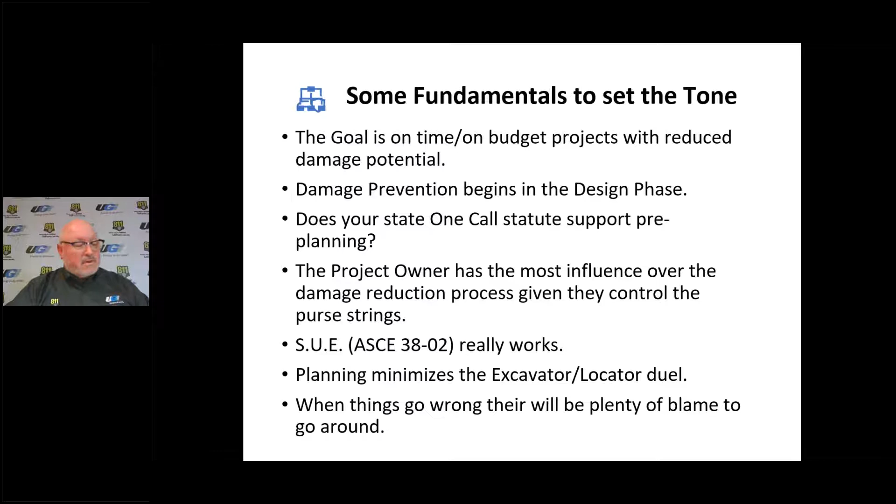Before I get into number one, I want to say that the discussion today about the 10 questions is something we've developed over time. It was an article we did for the Excavation Safety Guide back in 2016, and we updated it in 2019 based on the change in the Pennsylvania law, which really strengthened some of the questions, comments, and suggestions we'll talk about today. So with that, again, there's no silver bullet.

These 10 questions work. They can apply. There can be others you'd add that may be more unique to your situation, industry, or challenges you're having that might be more appropriate. So again, it's a guide. It's not a silver bullet that will fix every scenario out there.

The impetus for why we moved to the 10 questions article, and why we at UGI are subscribing to many aspects of that, is that we were seeing that many excavators will bid work without really understanding what the one-call statutory requirements are. That's more prevalent when that excavator may be working in multiple states and not always in Pennsylvania, Maryland, New Jersey, or the Mid-Atlantic area. They may even be further away than that, and their statutes, though similar, are different, with requirements that can be tighter, and enforcement varies across the country as well. So we do see that.

We also see that they generally will jump into a project without understanding what facilities may be under the surface that they're going to be working around or near, and just bid every job the same way. So that's a challenge we see as well.

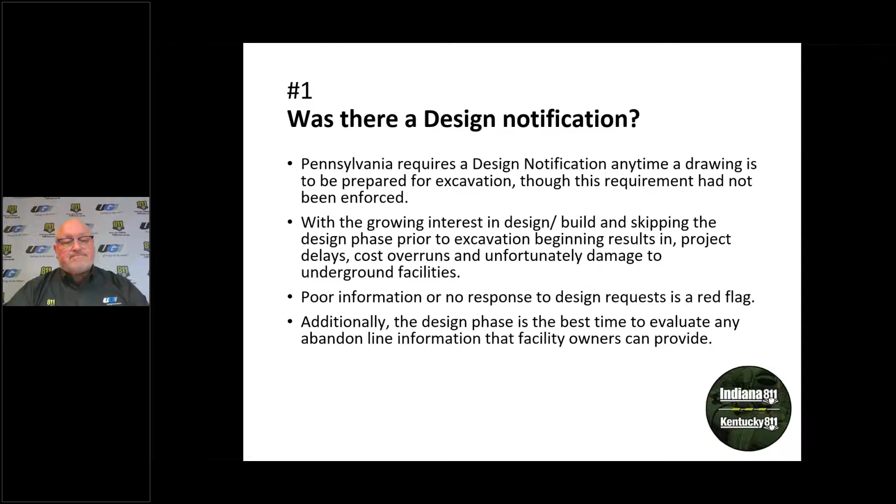Number 2: what quality level of SUE is applied? We talked about the SUE levels, and we'll get into that a little bit. Quality level D is really just a records review—a very preliminary look at things, not much legwork done. The levels of SUE are intended to build upon each other, going from least efficient or least costly, from D down to A. So it's kind of an inverse order, but each one builds on the other.

C is actually the field level review, where you're looking and making judgments based on things you can see and are visual to you on the job site. Then you roll into B, using geophysical, electronic locating methods, where you'd have a design mark-out or something completed. So you're getting a better visual and at least some feedback from facility owners on what's involved in that scope of work. Lastly, there's A, which is determining the precise horizontal and vertical position of that facility as it exists in the job site.

So where's that important, or why would you do that? Consider sewer pipe systems that are gravity-based—inverts require certain elevations. If you have a gas line that runs right through the middle of that new lateral tie-in, it's not going to work; the gravity is the essential requirement there. It's things like that that bring this to the forefront. But again, quality levels of SUE are important, and it's really about understanding what is going on out there and what you need to do to adapt to that.

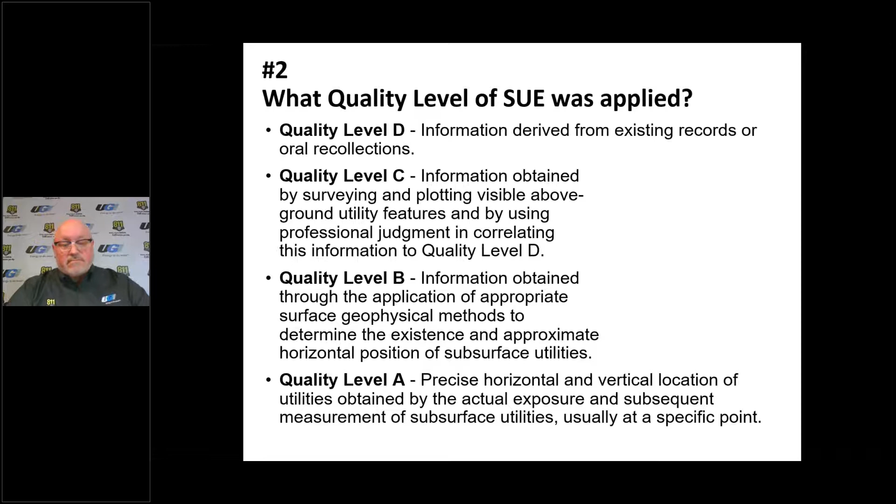Got a little problem here with the clicker. Okay, so there we go. A little problem getting the clicker to work here. My apology.

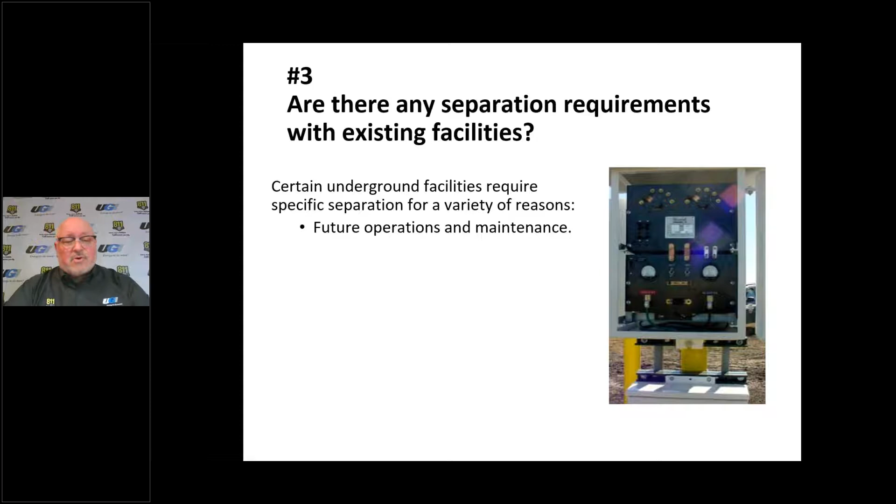Number 3: are there any separation requirements that exist with certain facilities? There are certain requirements with certain aspects, and knowing the gas business as I do, we're one of those. But why would you want separation? Well, there's a variety of reasons. Future operations and maintenance, to be able to dig and work around that pipeline is of critical importance, so that you have the ability to do that and do it safely.

Other drivers, at least in our industry, or in metallic facilities such as steel pipelines, may have a cathodic protection system. Those systems can be interfered with or impacted by metallic facilities in proximity, which would detract from that protection, or create a contact that would form an anodic cell and result in a potential leak or something down the road. So again, that's another real driver in that.

Because of concern of damages for future excavation, if something is too close, it's really a matter of respecting those tolerance zones and ensuring your facility's tolerance zone is covered. But what about your neighbor, the water line that may be a few feet away? Do they in fact have the tolerance zone required and the ability to work in that area safely, effectively, and efficiently? We know that tolerance zone brings some limitations in what you can do mechanically, at least in Pennsylvania. You have to spot the precise location before you can begin to excavate in that area with mechanized equipment. So again, a big production slowdown in that regard.

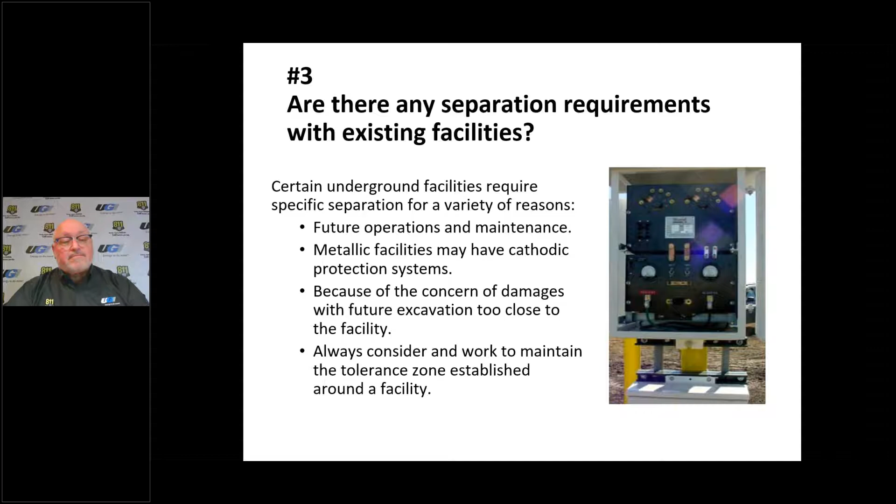Will the project be videotaped or photographed? Will it be memorialized? Are we going to see the site? Is it going to be a record that sticks with that project to the duration? Well, the project documentation exists for existing conditions, and it's referenced during construction. So you have a reference document as lines start to fade, or snow conditions occur.

Obviously, you can recall a ticket. There's generally a timeline required for that facility owner to respond to that. But a reference document is very helpful to be able to continue to work, follow up, and understand where those facilities are from a document that's memorialized in time.

Obviously, one of the big drivers in documenting those sites is about damage claims and documentation that you may end up needing someday in court or litigation. That can fall into a variety of things, whether it be sidewalks, curbing, driveways, or any of the things that could get damaged, and whether you did it or not, you could get blamed for during construction. Again, it provides great protection for general liability purposes.

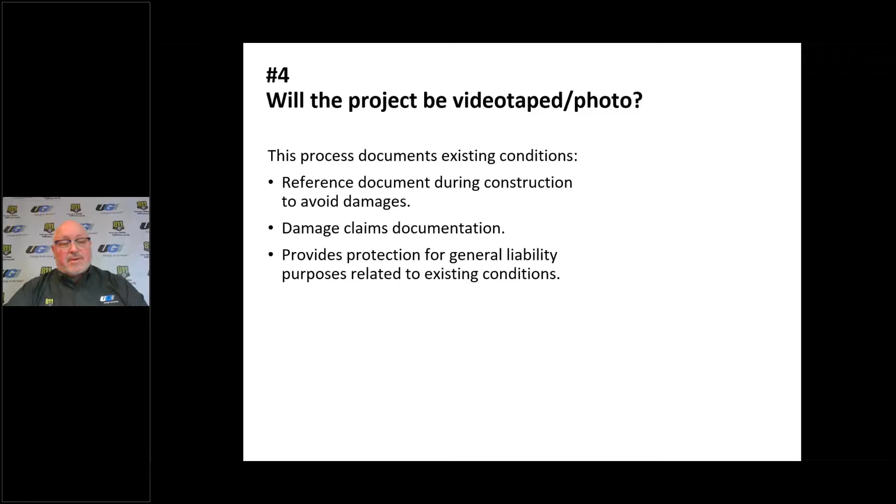Slips, trips, and falls. That sidewalk was already offset. I didn't break the sidewalk. It was existing when we were there, and that documentation would be exceptionally helpful in that case if you're in a courtroom.

Use of permanent markers or offset marks are strongly encouraged as well. Great videotape of that stuff. If you're milling a street curb to curb, obviously you're going to mill off the lines if there's a gas main or water main in the middle of the street, and you'll lose those. So offset marks are encouraged, and documenting those, either video or photo, is helpful to keep that point of reference and maintain those offset marks.

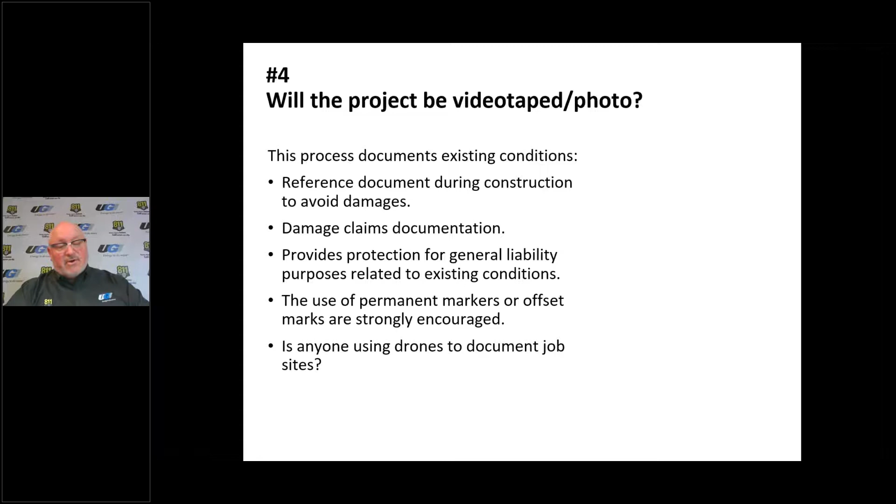The other question I throw out is: is anyone using drones to document job sites? It's a discussion we have often, and we hear in some of our industry associations about the use of technology that gives you good documentation, historical information, and does it efficiently with very good clarity and distinction as far as quality. So good opportunities that way as well.

Number 5: will there be a pre-construction meeting, or will the excavation area be marked in white? This is a big area when it comes to some of the CGA best practices we all interact with. Project meetings prior to the start of excavation are a highly leveraged activity. It lays the landscape out there for a better understanding of what the work is, what the impacts could be, if there are situations that need to be handled differently, timelines for work, etc.

So we in Pennsylvania are learning more and more about the quality and value of project meetings through the enforcement effort to ensure they're happening. Essentially in Pennsylvania, if you don't attend a project meeting, there could be an associated penalty with that work.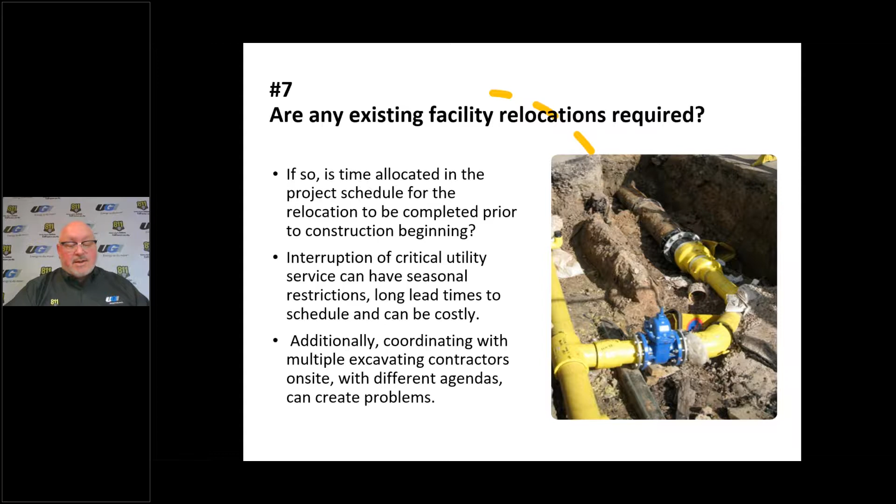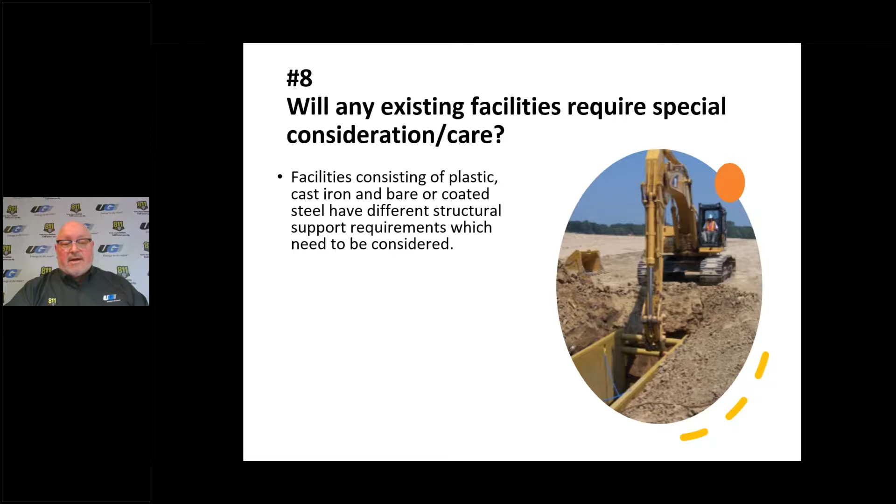Number 8, will any existing facility require special consideration or care? Relating to the gas industry, we have multiple types of materials our facilities are made up of: plastic, cast iron, bare or coated steel, all have different structural support requirements which need to be considered. Cast iron, if unsupported, is structurally very brittle and susceptible to damage either at the time of construction or later. Just an example of one of the things that need to be considered.

Additionally, any damage, no matter how minor, needs to be evaluated, whether it be a coating scratch on a piece of coated pipe, a break on a tracer wire, or tracer wire insulation damage. All those things have down-the-road effects or impacts that need to be considered, and somebody could come back and bill you for something that happened months prior after your job is done.

Loading impacts need to be considered as well. When you look at materials where you're stripping off paved material or cutting down a lot of fill in an area where there's a gas line buried 6 feet deep, and now it's 3 feet deep, running heavy graders, pans, milling machines across that area can have a substantial impact on that piping, and again create potential liabilities down the road that need to be considered.

Additionally, not only do one-call statutory issues circle around us, so does OSHA. There's a subpart P section which talks very heavily and very consistently about facilities requiring consideration, and those that are existing have a special place and are required to be protected during excavation.

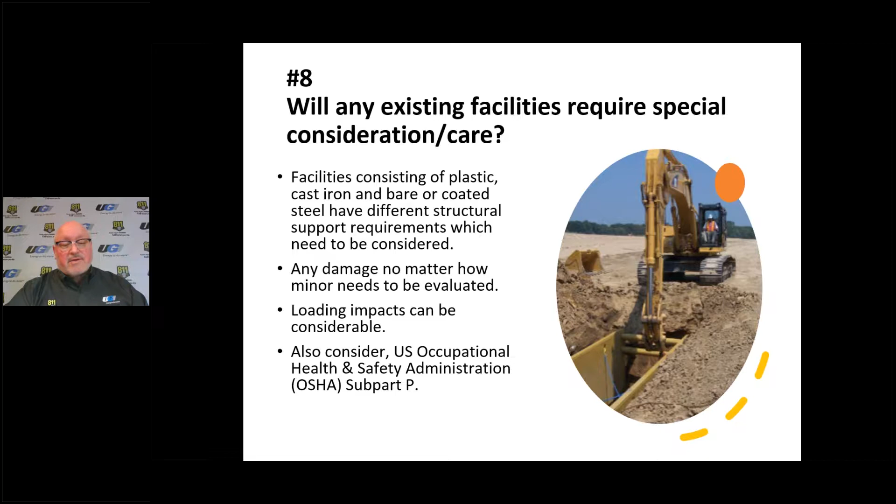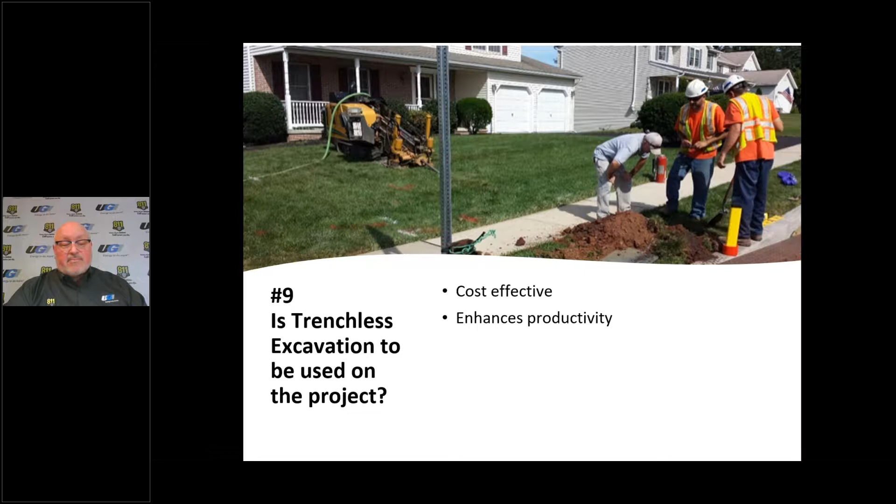Number 9: is trenchless excavation to be used on a project? Great technology. We are a big user of that, as most of the industry is. It's cost effective and enhances productivity, particularly in crowded areas where there's a lot of above-ground congestion and improvements made. It's also an area we've learned over time that you have to ask questions about, because the technology to some degree has outpaced the regulation and guidance.

We've been using boring and missile technology since the 1970s, and in fact we just adopted a law in Pennsylvania in 2006 where we adopted the North American Society of Trenchless Technology good practices. So the technology and the enforcement have come along, and we're seeing the kind of damages related to drilling work, missile work, and that type of thing catching up with the technology today.

So the spotting and daylighting requirements through quality level A are certainly appropriate and required for this type of work. That costs more money generally—you've got to bring a vac truck in or hand dig. So those considerations need to be made again when you put your bid price in.

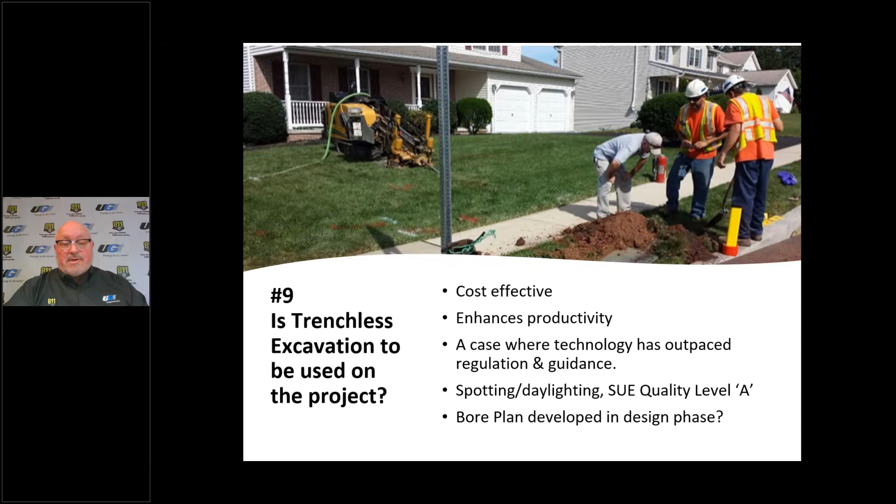Your bore plan should be developed in the design phase. If you're going to outsource the drilling work, make sure the driller has a bore plan considering the existing assets, or again, delays and damages are all going to be on the forefront for you. And then we look at trenchless work.

Again, we're big fans of it. We really appreciate the savings and the opportunity. But it's a situation where, while there's a low probability of damage occurring with trenchless, the consequences generally can be pretty significant, particularly on the gas industry side, where you might drill into a gas line under a paved street and there's nowhere for the gas to escape.

So you're seeing situations where now you've not just got a damage, but you've got evacuations and potential issues where gas migration could be causing even greater problems. So this kind of planning—bore plans and spotting in advance, and ensuring there's compensation for that—are really big opportunities to prevent such tragic events.

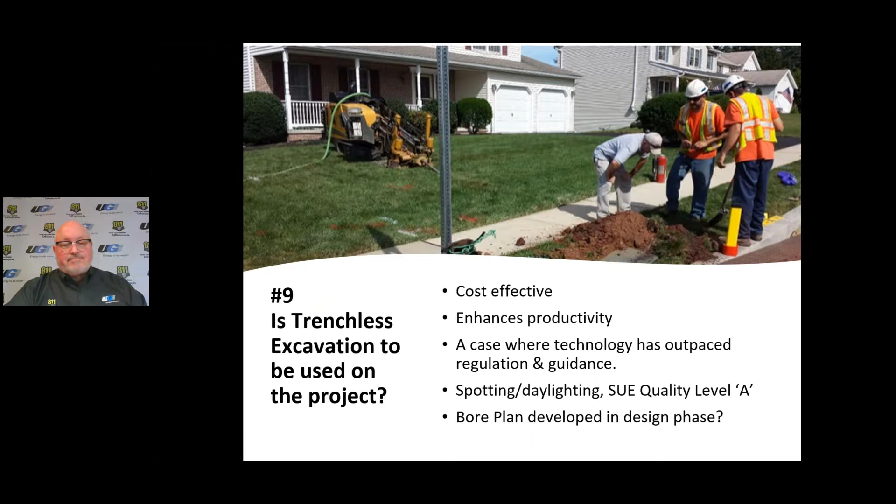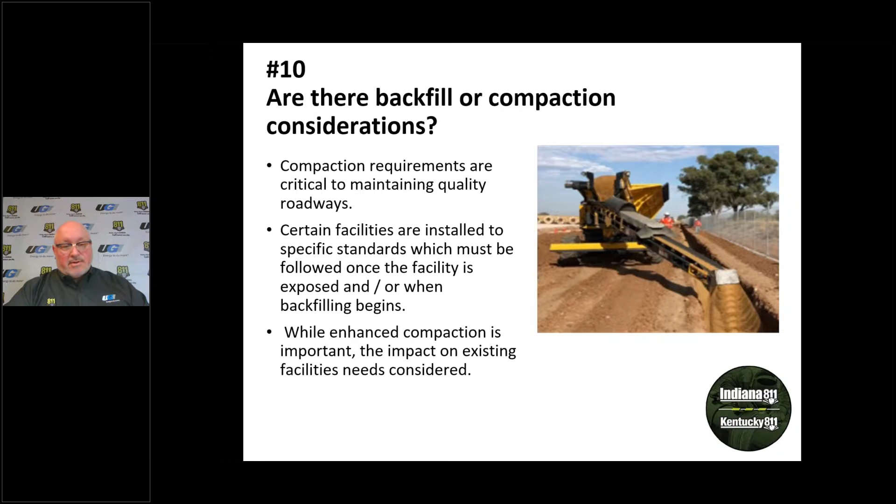And while enhanced compaction is important, the impact on those facilities needs to be considered. You start using a vibratory compaction tool around a cast iron main, and you greatly increase the probability of that brittle pipe becoming fractured, if not today, down the road as conditions and settlement occur. So it's a big factor—you build in considerations for issues in the project today, as well as liabilities going forward.

Pardon me. One more thing there. So knowing what's below is really key, and it's really the mantra of 811. Call 811, design, construction, project planning meetings, use those tools available through the one call centers, and make it happen.

And that's where the opportunity is to share nationally and look at statutes in different states and try and pick the best. And can we apply that in our state? Is it something we could get into our legislation, or a tool we could use in our center to make damages less frequent and productive work even more common?

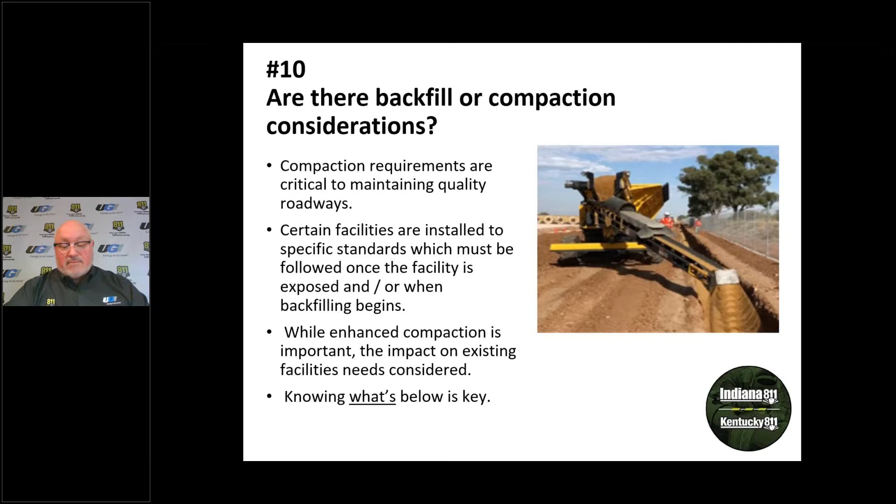Pardon me. In the end, it's really about preventing damages to underground facilities. Okay, can we prevent those damages from occurring in the beginning? By planning, we can do that. It's really about leveraging relationships. If you have those project planning meetings, those design meetings, we are looking and working with those existing facility owners.

If something doesn't go as planned, the opportunity to recover from those and maintain a good relationship are even more prevalent once you've established that good groundwork up front. So use those processes to help develop that.

Some other tools to help you get there: Common Ground Alliance, a big promoter of the regional partnerships. In Pennsylvania, we have nearly 30 regional partnerships throughout the state, and very good, highly leveraged activities when it comes down to the 4 C's of communicate, collaborate, cooperate, and coordinate.

I could give you countless examples in some of our regional partnerships where there have been collaborative efforts and 6-figure savings on large projects due to coordination, whether it be worksite savings, paving savings, those type of things, all with making the job easier, more economical, done on time, and having less impact on the public.

So really good opportunities to talk and get in those environments. Some of those meetings are quarterly, monthly, but again, a great opportunity. If your state's not pushing those now, it's just a great opportunity to get involved with regional partnerships.

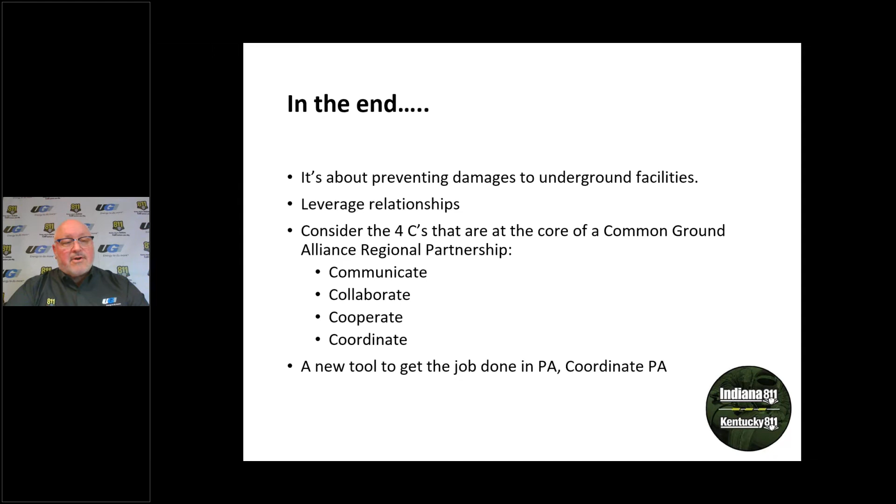So with that, I'll close up and just say thank you very much for the opportunity. Like I said, it's great to be in the Midwest virtually today with all you folks, and hopefully there are some things you could draw out of that, take back to your shop, put into play, and make a difference in your damage portfolio. Can we get better? That's what it's all about, doing and sharing that information as we go.